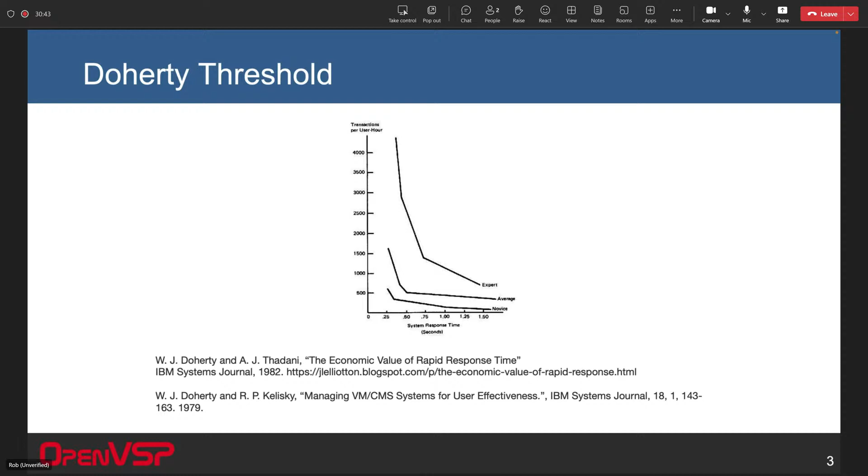They did some studies, mostly using dumb terminals interfacing with mainframe computers. They were looking at system response time on the x-axis, which was the time between typing in an entry to the dumb terminal and when you got a response back from the mainframe. What they found was a highly nonlinear effect: getting very low latency, very short system response time, resulted in a huge increase in productivity and output, in how many transactions someone could handle.

There was lots of other research done similarly, looking at other measures of system response time in different cases and what the resulting productivity was. The short version is that in a creative process, your ability to stay focused on something, iterate on ideas, and produce output is very much related to how quickly the system responds. That can be very short latency, measured in seconds or milliseconds, but it can also be much longer.

For example, if you're doing an analysis and that analysis takes a week to run, you get very little interaction with it, very little creativity, because every time you spawn off a job, you go do something else for a week while you wait for a result. Then when it comes back, you have to iterate, and that kills the iteration process. Whereas if you can do an analysis that comes back in seconds or minutes—the shorter the better—it's much more conducive to a creative, iterative process of design and how we work.

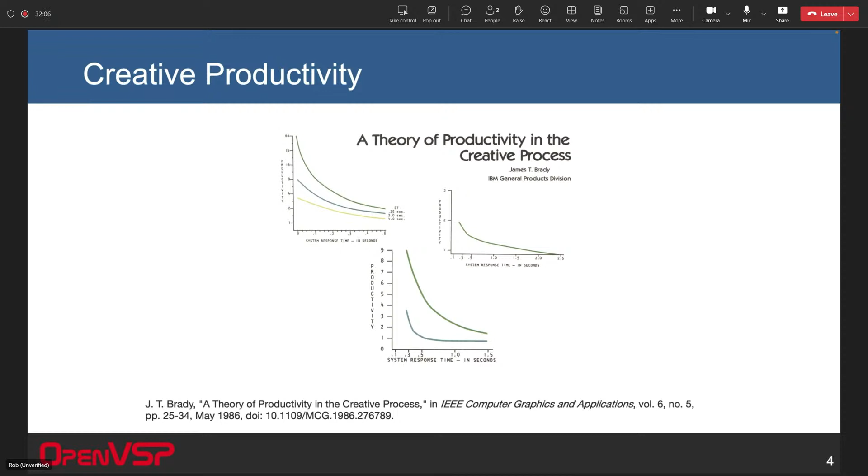That background really motivates a lot of why OpenVSP is trying to be so fast and do so many of its analyses so quickly. So let's talk about what geometry does in the role of aircraft design. Really, geometry is the start of all kinds of analysis and design. It is the first step in all of these things: aerodynamics, structures, acoustics, mass properties, RCS, all these things.

Think back to when we were in engineering school. When you took statics, one of the most basic engineering classes, step one was always draw a free body diagram, right? When you start engineering analysis, you start with the geometry. That's pretty universal across most analyses, whatever the analysis is, whatever the fidelity is—the shape is that common denominator.

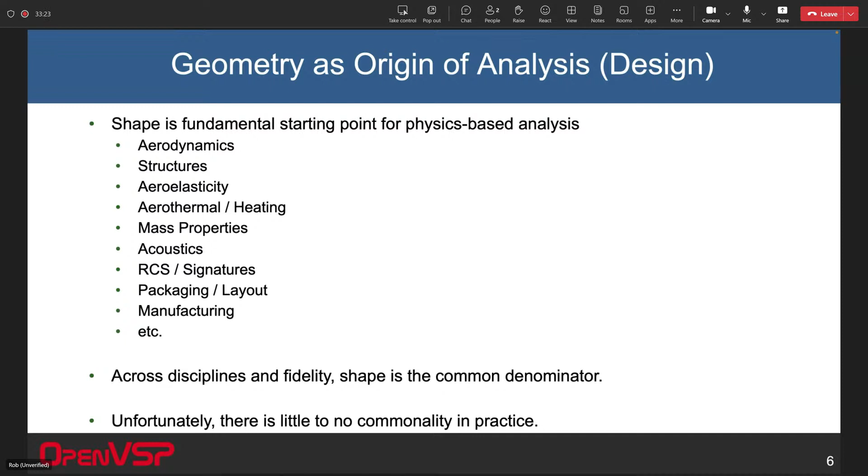However, in practice, there really isn't much commonality between these, because of the disparate needs of these different analyses. Aerodynamics cares about the OML of the aircraft, whereas packaging and layout cares about all the things on the inside. They couldn't be any more different in terms of their geometry needs.

So the true geometry—what does that mean? What is the true shape of the airplane? As it turns out, if you go out and walk around an aircraft, the actual physical manifestation of it, that true shape really doesn't correspond one-to-one with any of the particular geometry analysis representations that have gone into it.

The CAD model is typically built with a single analysis intent. If you're building a CAD model for manufacturing, you build the model one way. If you're building it to check integration and maintenance and reachability—can the mechanic get their arm up into that nook and cranny—you build it another way.

You build a model a different way. If you're going to do a structural model, then you build the model that way. And often the structural elements don't actually correspond to the CAD model. What I mean there is you may use beam elements to represent something like a hat section without actually modeling the detailed geometry of that hat section.

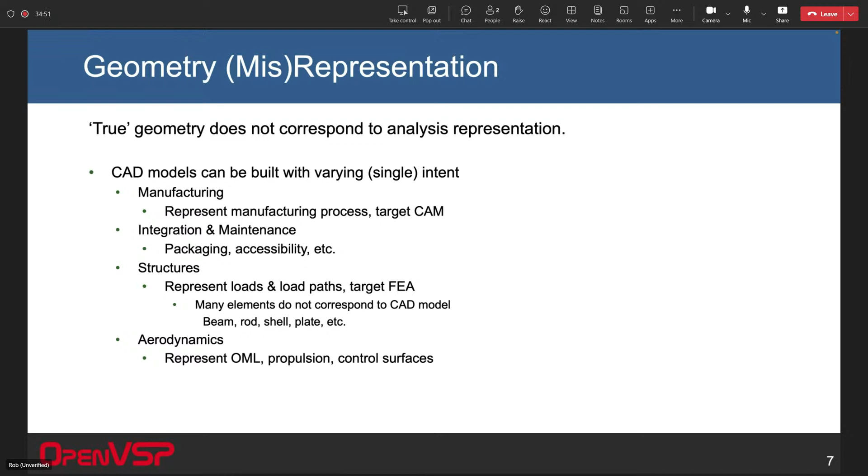And of course, aerodynamics, you care about the OML, and then the propulsion is maybe done as a boundary condition. So the analysis doesn't always have to match the geometry in a primitive way. We usually glance over this because we understand what's going on, but in terms of representation, there's actually significant differences here.

There's also a modeling gap in the way that we approach geometry and analysis. Historically, every analysis tool had its own geometry engine built in. And so every analysis tool had its own integrated geometry stuff, and it used its own inputs and it performed its own analysis in its own way.

Then the more modern approach is using CAD. CAD would then feed a very general purpose mesher, whether that was for CFD or FEA or other tools. So we go from CAD to some elaborate pre-processing tool to prepare the input to our code. The CAD approach is nice because you might end up with one representation that feeds multiple analyses, but again, you don't really, because you have to model it differently in order to achieve that.

Whereas the first approach means that if you have 5 analyses, you end up with 5 different geometry representations, and not just mathematically and conceptually what they represent is different, but the variables, the inputs and the parameters that represent them are usually different.

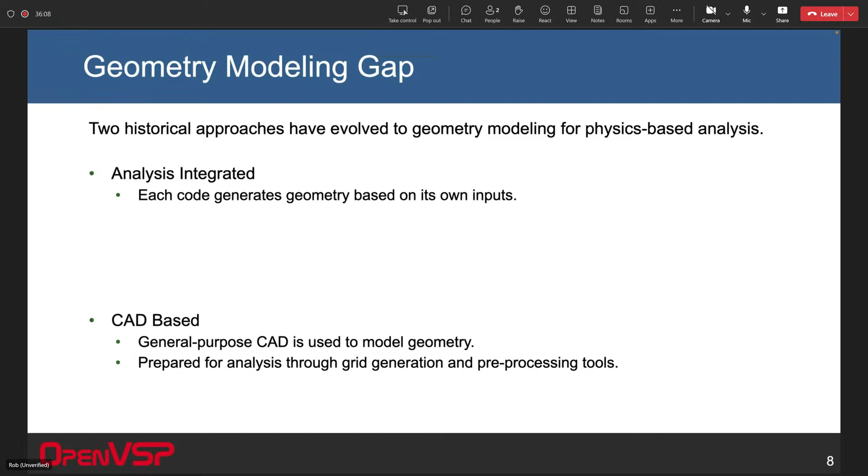When you put this together in an actual productive engineering workspace, you usually end up with a single flow from a representation through to a single analysis tool. And this is just human nature, right? We don't have the resources to go and invest in many, many analysis tools and many, many workflows.

So when a company invests in automation and validation and experience in training their team, when you invest in one tool, which is the full stack from geometry processing all the way through to a result, that becomes the tool you use for everything. You use that tool for all levels of analysis, whether that is the best choice or not. And so we end up with a de facto very little choice in analysis fidelity.

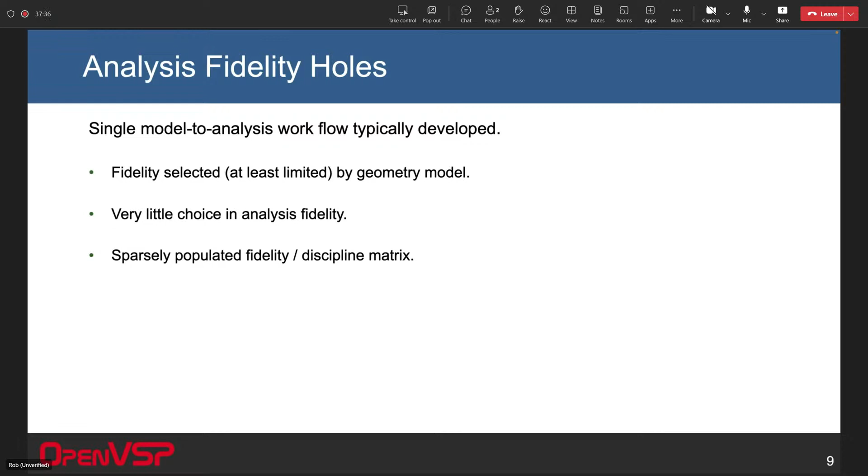If we think about different fidelity levels and different analysis disciplines as a matrix, we would ideally like to have a densely populated matrix that we can choose our analysis and our fidelity based on the problem at any time. In reality, we end up with a very, very sparse matrix where we're lucky to have one analysis for each discipline at all, much less multiple levels of fidelity.

So really, in a VSP setting, all of these representations can be generated from VSP. The fundamental question is, what is the geometry as far as what OpenVSP stores and keeps in memory and saves to disk? We're not saving any of these representations. What we save is the parameters. The parameters that you're adjusting in VSP, those parameters are the geometry.

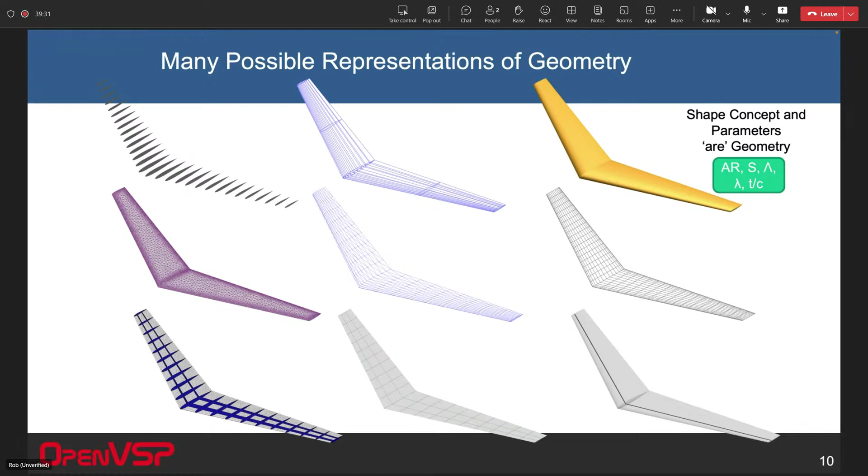And all of these different representations are created as needed. Sometimes that's on the fly, but sometimes it's through an explicit action.

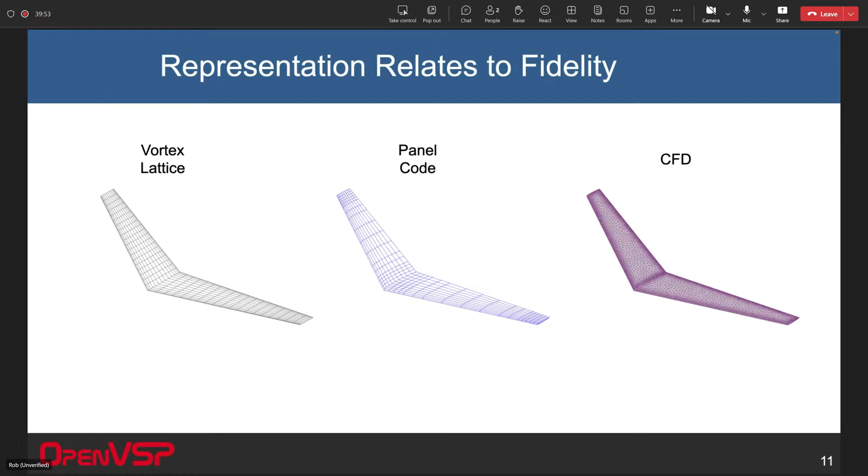Now, the representation relates to the discipline, as I've said, and it also relates to the fidelity. So a vortex lattice simulation needs one representation, a panel code another, and CFD another representation. The representation may relate to fidelity, but the important thing is that people often mistake that for the stage of design. Some people think you use low fidelity tools in conceptual design and higher fidelity tools in preliminary, and then highest fidelity in detail.

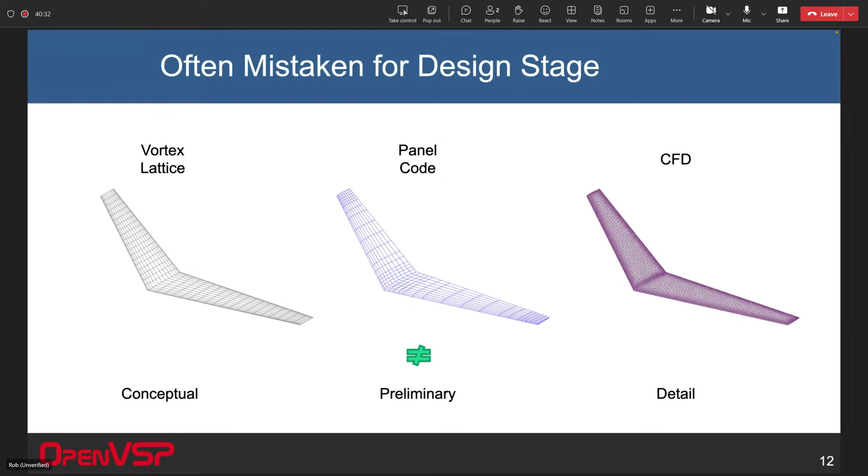And that's not actually how the mapping goes. There are times when it is appropriate to use low fidelity tools very late in the life cycle of a project, and times when it's appropriate to use high fidelity tools very early in the life cycle of a project. So it's not this monotonic low to high as a program progresses.

So let's talk a bit more about fidelity in the design process. This is my soapbox moment.

First I'll share a figure from my late friend Lee Nicolai's textbook. This is from the 2010 edition of his book, but if you look in the 1976 edition, it's the exact same figure, it just wasn't in color. Lee's talking about the conceptual design process and the aircraft design process from conceptual to preliminary to detail.

Sometimes to make those decisions we need sophisticated analyses early on, but sometimes we don't. In this process, there are times when you need a sophisticated transonic CFD code in early conceptual design, and there are times when you're going to do paper and pencil analysis of the loads on a bracket in a structure very late in detail design. And that's entirely appropriate, choosing the fidelity as you go.

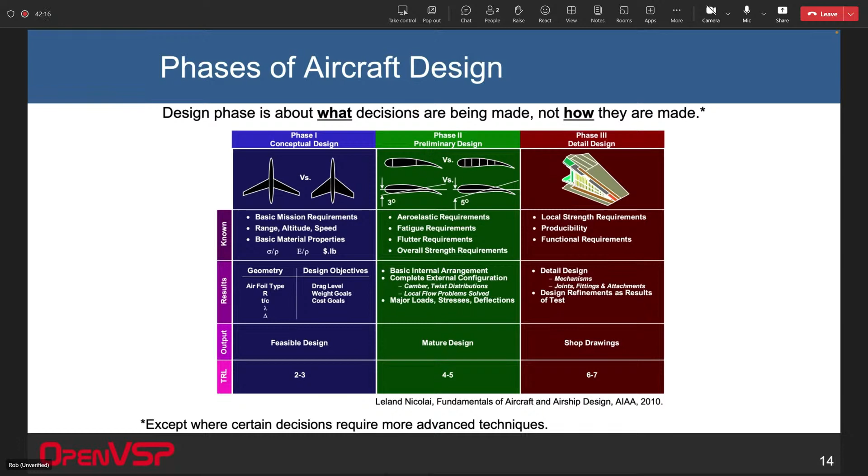I have a little bit different perspective up here on conceptual design, and what I really like to teach is that the real outcome of a conceptual design process, of a conceptual design program, is not the airplane design. The output of that is actually a go, no-go decision by your leadership. A conceptual design process is all about leading up to that go, no-go decision.

Does this program continue? There have certainly been cases where successful conceptual design processes have gotten to that point, they've made a go decision, and then they throw out the design and start over. And that's okay. So when you think about conceptual design decisions, and the conceptual design process, you need to think about them with respect to that go, no-go decision.

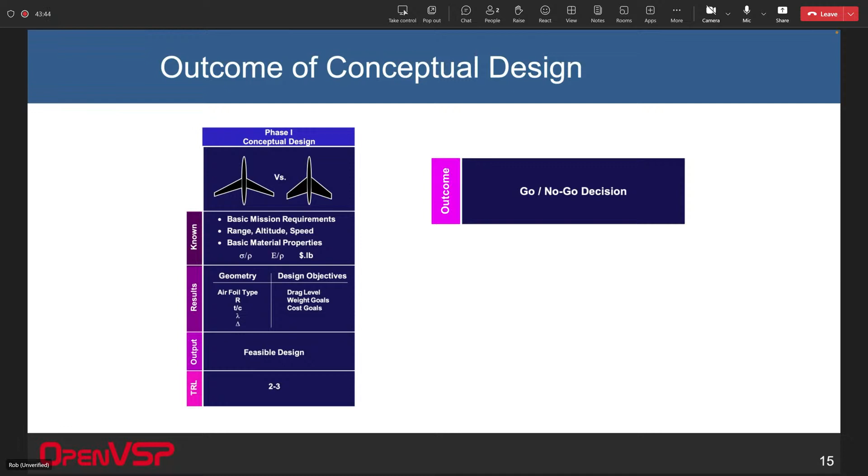Does whatever rabbit hole you're going down, whatever fidelity and whatever decision you're trying to make or add to the simulation, does that thing influence whether it's going to be a go or a no-go decision? And if it doesn't make a difference, then you're not spending your time on the right thing. You need to be focused on what influences the go, no-go decision during conceptual design.

OpenVSP uses parametric design, and the shape representation that VSP has is really those parameters. That's true throughout all phases of design, it's just that what those parameters are evolves. Early in the conceptual design process, we have high level parameters like aspect ratio, area, sweep angle, taper, thickness to chord. As we move to preliminary design, we're talking about more nuanced twist distributions, thickness to chord distributions, complex wing plan form, detailed high lift geometry, control surfaces, all of this kind of thing. So we have more parameters and they've evolved. Then we go all the way to detailed design, where the generalization of parameterization may break down, but the parameters at that point are the angles and dimensions in the drawing. So as we move through design, what phase of design is based on what decisions are being made, not how they're being made.

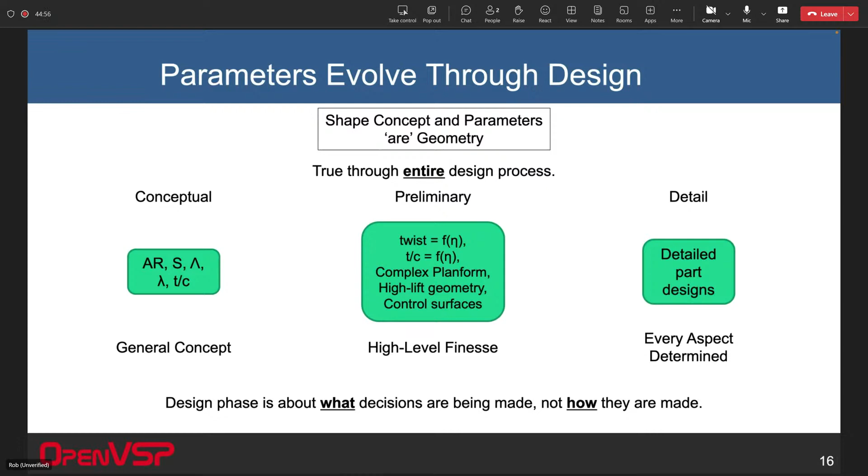Let's talk a little more about the design process - another soapbox for me. A rational advanced design process: this is the way it should work. We start with a mission, and the mission is there to answer the question, what is the aircraft going to do? We move from there to the ConOps, how is the aircraft going to do that? So what is the aircraft going to do? We're going to move people around inside a city.

The ConOps, how are we going to do that? We're going to take off and land vertically, move very quickly, and recharge very quickly. You take your mission and your ConOps, and then you can start to set the requirements. You use those and figure out, okay, I need to carry this many people, I need to go this fast, I need to fly this often, I need to be able to take off and land out of this size of a heliport or landing field. We're quantifying the requirements for that ConOps and that mission.

Only at that point should we then move to defining the concepts. Here, when we're looking at these concepts, we're looking at the system architecture. Is this going to be a jet wing? Is it going to be a tilt wing? Is it going to be a fixed wing aircraft? Is it going to be distributed electric? Whatever that conceptual architecture is - you can think of these as discrete big block things.

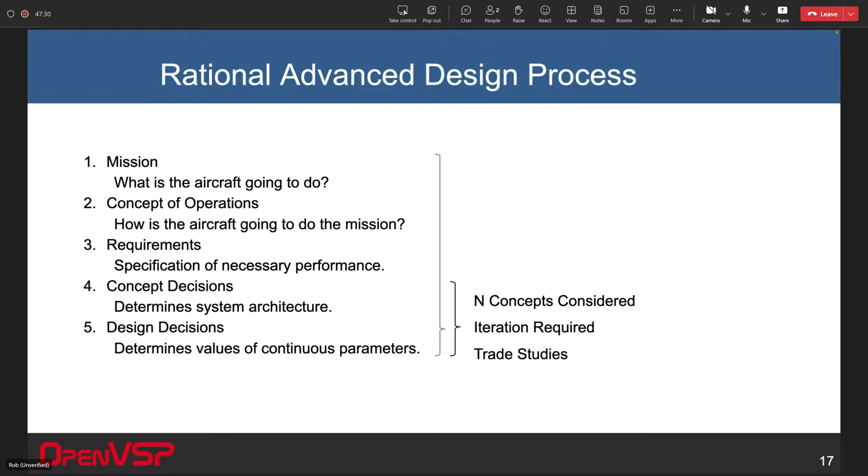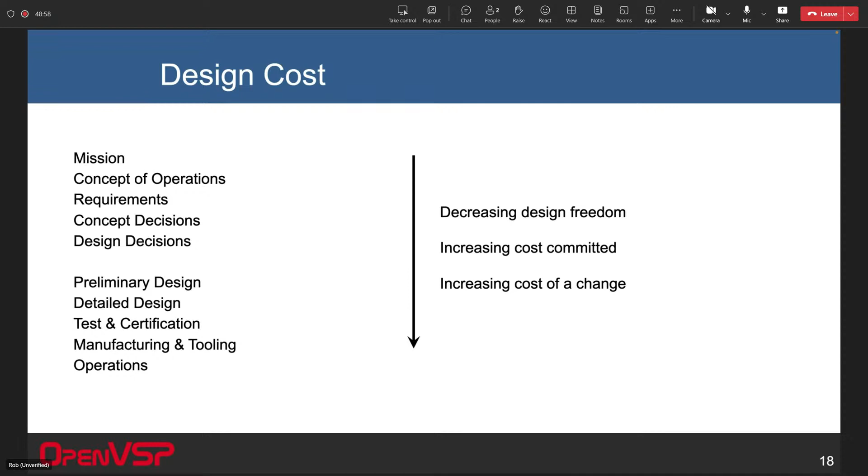But it's true through all of these steps that the further you go in this process, the more expensive it is to make a change. And that means you want to make all those changes up front. You want to make those decisions when it's cheap, before you've committed the cost, before making that decision gets expensive. And so you want to do this in a rational way and proceed.

Now, unfortunately, the reason I talk about the way it should work is because very often these days it seems that it doesn't work that way. And I'll say that there's a lot of quote unquote innovators out there in the aircraft design space.

The process doesn't follow what I've laid out. Instead it typically starts with somebody who's had a decision about what the concept ought to be, and they make that concept decision up front. They've decided this is the concept. It's probably an arbitrary decision because they didn't actually do any trades or any comparison, and they make that way too early. And now that they have their concept, they hire an engineering team and throw it over the wall.

They say, make it work. Try and figure out how to make this happen. Take this concept, make an airplane.

And what we find is as they proceed in that, they go out looking for a mission. Okay, well, we've got a concept, we're going to have an airplane. What on earth is this thing going to do? So we go searching for a purpose. What's the point of having this aircraft?

And they move from that to, well, now we've got an aircraft already defined, and now we found a mission. So now we force the ConOps to fit our aircraft. We're just trying to shoehorn it into a particular ConOps. And this process is very awkward.

And the thing that's missing from this is the requirements, right? Nobody ever states the requirements. So the engineers in step two are fundamentally working to an ill-posed problem because they don't have requirements to design to. And they're just going to treat the requirements as a fallout. It can do whatever it can do. And whether that meets the mission in the ConOps or not, oh well.

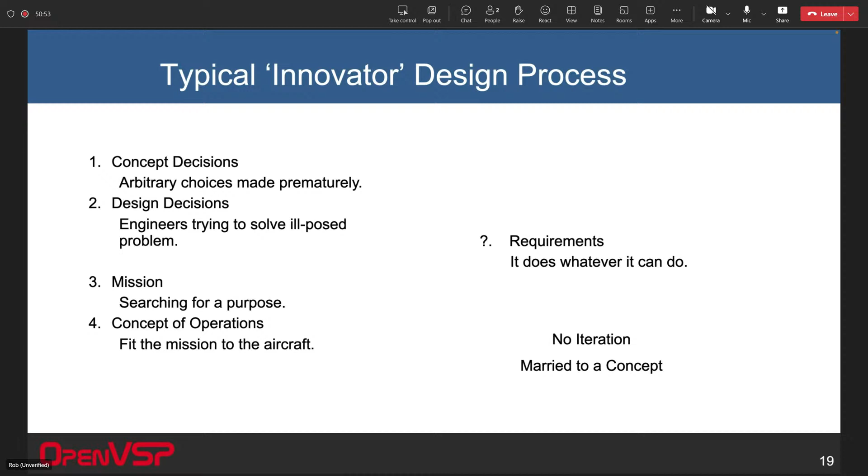Now, I'll juxtapose this with the fact that I think fidelity is used poorly today in engineering. I think it's all too easy to push for quote unquote higher fidelity. There's this constant push. People seldom get fired for using too high fidelity of analysis.

And Moore's law justifies and enables this continuous increase in fidelity. And there I'll just say that I'm talking about the number of floating point operations per answer. What is the computational cost? Even though that's often increasing fidelity per answer, but at constant calendar time.

I feel that if you went back to the early days of CFD and tracked the wall time of the top of the line, state of the art CFD analysis, it would stay about the same. It's about one week. And from the birth of CFD to today, that's remained essentially constant. The top of the line CFD analysis remains one week.

And I would argue that that is not because that is the analysis fidelity that is required or needed, but it's just because that's what they can accomplish and what they have the patience for. So the pursuit of fidelity is actually separate from the actual needs of programs and analyses.

So I'll go a little further. We often see, and I'm talking specifically in eVTOL, just because that's an area that I have a lot of familiarity with, these marquee CFD calculations where you have an animated high color rotating blades, elaborate color video that's the result of a weeks-long supercomputer analysis.

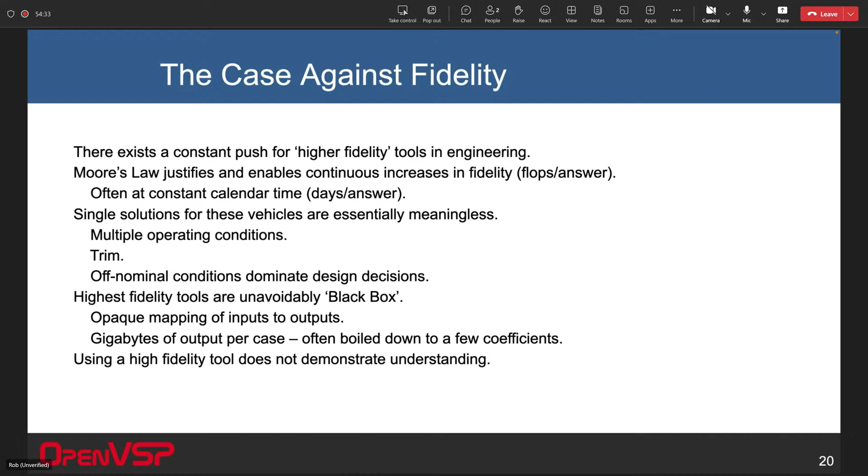They produce gigabytes of output on every case, and then we boil it down to just a few coefficients. Really the outcome of this, in my opinion, is that when an engineer chooses to use a high fidelity tool, they may or may not have understanding of the problem. That choice of using the high fidelity tool does not demonstrate that they understand the problem. They very well may just be, I don't know, so I'm going to throw the high fidelity at it.

On the opposite side, if we go back to this rational design process where we need to look at multiple concepts and iterate and do trades in order to make decisions when they cost the least, fast, inexpensive tools are essential to conceptual design. We need to look at more concepts, more iteration, more trades, more insight, and all of this enables the creative process by getting that response time down.

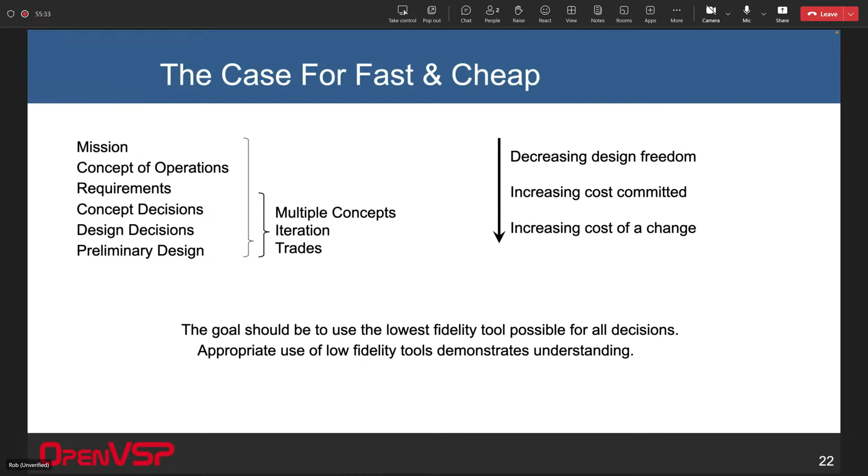The goal should always be, in my opinion, to use the lowest fidelity tool possible for all decisions. And I'm not saying that recklessly—you have to know that the tool is sufficient to make the decision. You have to understand the problem well enough to know that the tool can support the decision you want to make. Consequently, if you do this and you're successful, appropriate use of low fidelity tools does demonstrate that you understand the problem and the decisions you're making.

So let's talk a little bit about OpenVSP. That's my rant to start the morning.

Here we are, we're in 2025. I think we've had 13 or 14 different OpenVSP workshops, which has been amazing, because when we did the first one, we didn't know it was going to become an annual event—it was just the OpenVSP workshop. So I ask every year, how many of these have you been to, and what version of the software are you using? Right now, the current version is 3.43.1. If you're using 3.25 or something, come on guys, it's time to update.